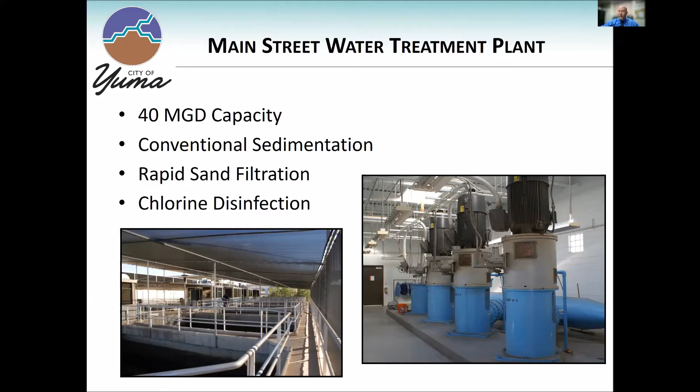Our newest treatment facility is the Agua Viva water treatment plant. It was built in 2009. And it's actually two treatment facilities on one site. There's a groundwater plant, which uses groundwater wells, and there's a surface water plant, where we use Colorado River water. So the surface water plant is rated at about 20 million gallons a day, and the groundwater site is rated at 9 million gallons a day.

At the groundwater site, groundwater is naturally pure by nature, but there is some sediment in there we want to remove, and that's iron and manganese. We don't want that in there. If we chlorinate the water with that material in there, there's a potential of that coming out in the distribution system. So we use iron and manganese removal for the groundwater site.

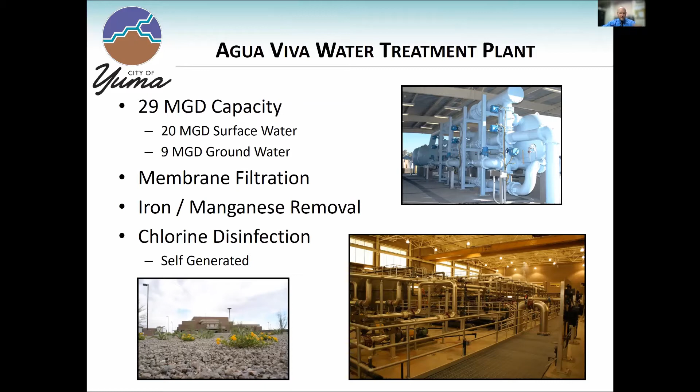From the water treatment plants, the water goes into storage. So we have multiple storage sites around town. And one of the most obvious ones is by the Interstate 8 and 16th Street. We call it our 16th Street booster pump station. On that site, we have 3 storage tanks. Each one is 3 million gallons. So in total, we have 9 million gallons in storage at that site.

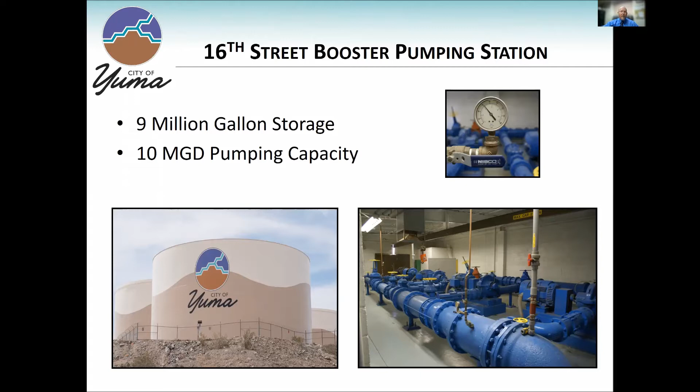Water is pumped there from Main Street, stored on site on demand. So when demand calls for it, it maintains pressure in the system, and it goes out to our customers. We have the capability of pushing out 10 million gallons a day at that site.

We have 2 storage tanks at Agua Viva. Each one is 2.5 million gallons. So in total, they are 5 million gallons. The surface water plant and the well water plant contribute to each one of these sites. It's in storage, and as demand calls for it, it also goes out into the distribution system.

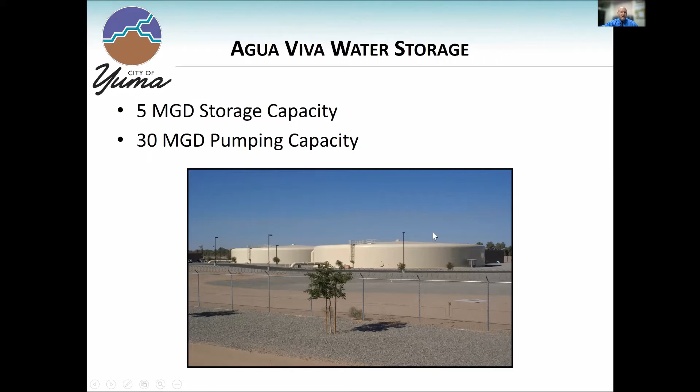One of the most iconic treatment storage towers the city has is called Friendship Tower. Very known in the community. It's used for some of the festivals throughout the year. 4th of July, we hang a flag on top of it. And during Christmas, we use it for a Christmas tree lighting ceremony for the area, Yuma.

So what makes this one unique is it's an elevated tank where the water is stored at elevation. And the water flows out of there just through the force of gravity. And on that site, there's 1.5 million gallons stored.

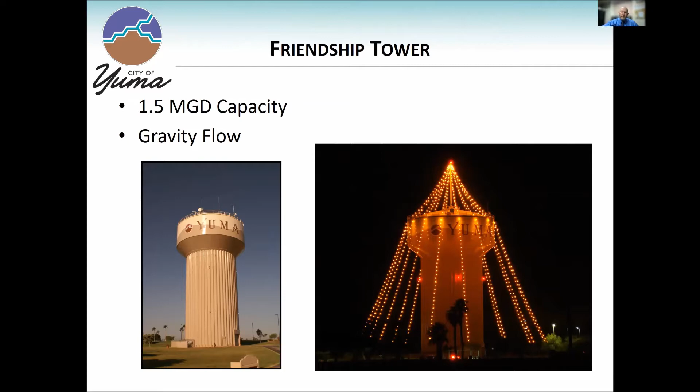So from storage, it goes into all the distribution piping to our customers. So the city of Yuma maintains, again, all this infrastructure. There's about 550 miles of pipe in the ground. There's about 17,000 water valves and various pipe sizes ranging from small all the way up to 48 inches, which is about 4 feet or so.

We have close to 4,000 fire hydrants. Each one of them is uniquely identified, has a serial number, and is managed through a GIS system. So when the fire department needs to respond on site, they know the status of that hydrant, whether it's active, inactive, when's the last time it's been serviced. But the utilities department does all that maintenance on the hydrants. And of course, we respond to all the emergency after hours complaints, issues with leaks along the way.

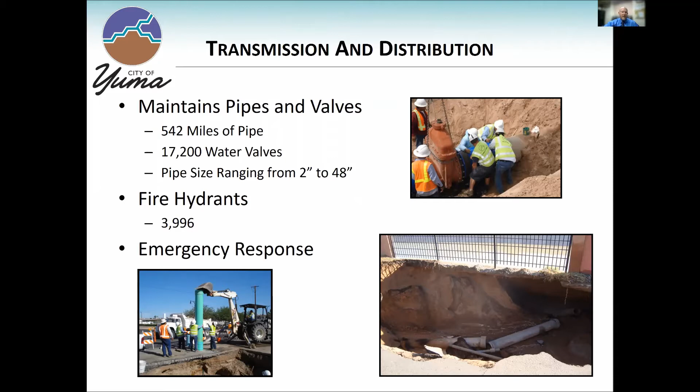The water finally ends up into the water meters. We have close to 33,000 water meters. That ranges from residential, commercial, industrial, and the majority of our water meters for the city of Yuma is residential. Over 50% of our customers are residential, and close to 45% is commercial, leaving about 5% for the industrial water meters.

I do list a small section there as a roving meter. That's our construction activities or unique one-offs where industry may need to move around a meter. So they're local roving meters, and we do that on a monthly basis. We'll check it out to a user. They use it at will, and they bring it back to us to service and read and bill them.

All the fixed asset meters that we have deployed, the 33,000, is what we call an AMR system, which stands for automatic meter reading. So no longer do we have to go on site, flip up a register, look at a dial with a pencil, write down the quantity used, the consumption.

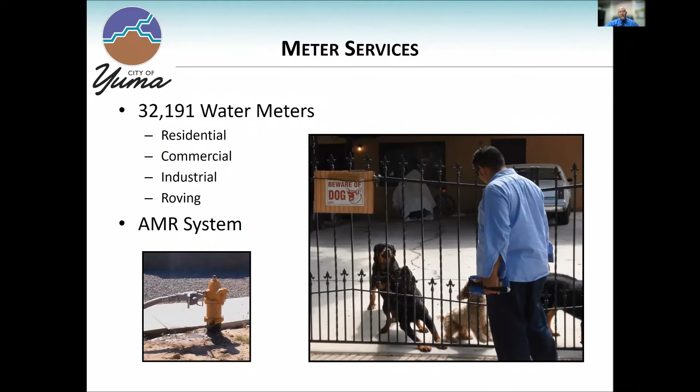We actually drive by with a computer, and within a geographic area, such as a neighborhood, a city block, we can pick up all those water meter readings monthly, put it into our system, and get it back to customer service for billing. There's a lot more data in there. And so if we have issues with water complaints, we can actually dive into the data, and it keeps information about water consumption. And we can tell you exactly when water consumption starts and stops through the technology in AMR.

That's where our customer service crews come in. So they're the team that comes out and they do the interface with the public. They do our turn-ons and turn-offs. If there's issues with non-payments, they'll come out and talk to the customers about the water going off. We'll hang notifications that the water service is turned off, and how it can get turned back on.

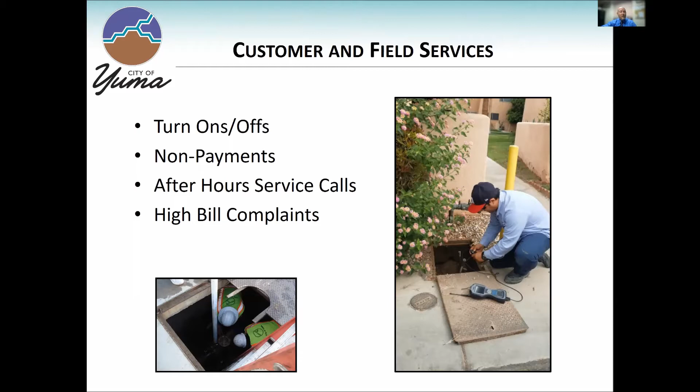Being the front line for the department and for the city. Trying to resolve those high bill complaints if they have them, and provide information to the customers about when the water consumption may have started or stopped, such as a sprinkler system coming on overnight, or maybe a toilet not working.

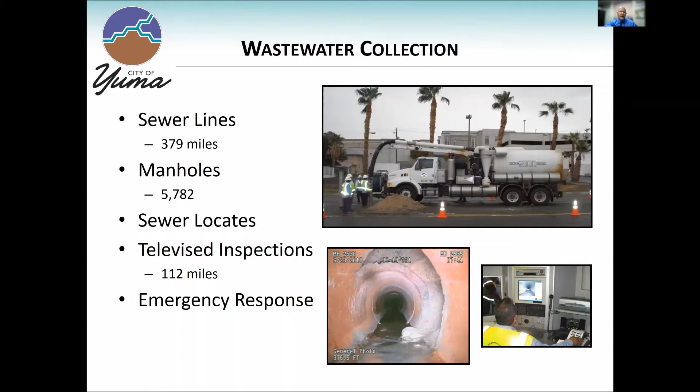We inspect linear feet, and the operator on the right-hand side of that, we see what he sees from his computer screen. He notes any breaks in the line, the condition of the line, the size of the line, the type of line, such as clay, PVC, concrete. So we typically do over 100 miles of pipe inspection a year as well. And of course, they do emergency response and issues what we call sanitary sewer overflows, which are environmentally regulated occurrences of release of wastewater.

So from the gravity lines, the wastewater is not a pressurized system, so it flows into what we call lift stations. So being gravity, it flows downhill to a point that becomes too deep, kind of dangerous to manage. So we lift it back up, still underground, but maybe just a couple feet below the surface. Then we let that gravity flow again to a deeper elevation, such as 33 feet or so.

We have 25 of these lift stations around town. They're located within neighborhoods, sometimes geographic locations, like in front of the Marine base. We call that one the 36th Street lift station. Rather large, kind of does a majority of the share. And they all lead back to the wastewater treatment facilities.

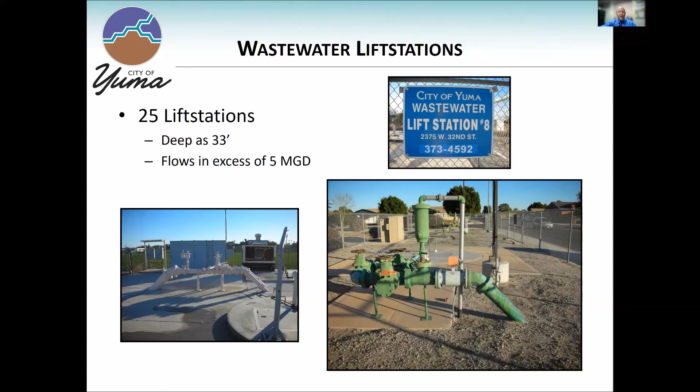Each one of them has signage. So sometimes an audible alarm will go off and indicate there might be a problem at that site. So if any of our public out there, they can relay that back to our customer service team. Hey, there's a problem with, in this case, lift station 8. And our guys who are on call 24 hours a day would go out and respond and see what exactly the issue with the lift station is.

So as the wastewater goes through the lift stations from the pipes, it all ends up at a treatment facility. The city of Yuma runs 2 treatment facilities, Figueroa and Desert Dunes. The oldest and largest is the Figueroa Avenue Water Pollution Control Facility. Its current design was conceptualized in 1968. It predates the Clean Water Act, which came in 1972. But even before 1968, it was a primary treatment facility, which means for the area, it kind of removed some of the largest stuff in wastewater and discharged it to the river.

So when the Clean Water Act came in, it really required specific requirements of water quality. And that's what the plant was designed to do. It was designed as a 12 million gallon a day plant. It's currently treating about 8 million gallons a day. It's a conventional activated sludge, which means it does secondary treatment, and it uses an aeration basin process. Of note is the water that's treated by the Figueroa facility is discharged to the Colorado River, and that's very important to us, and I can talk about that in a little bit.

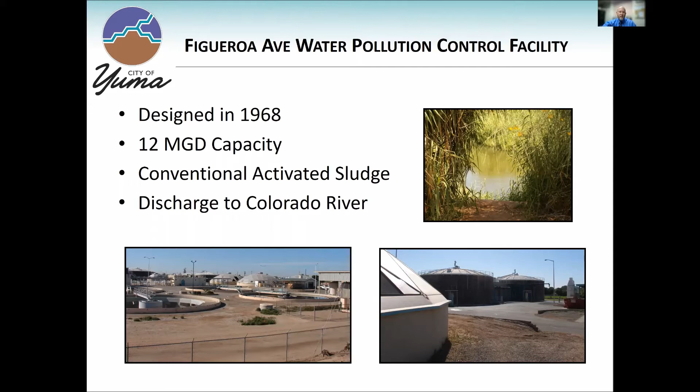The second treatment facility that the city of Yuma operates is the Desert Dunes facility. It's our newer one. It was built in 2005. It's located about 40th Street and 6E. It was built on what we call the Mesa. And the reason we chose that site is predominantly where we anticipated the growth to occur in 2005. And sure enough, it has grown exponentially out there in the last several years.

The site, being newer technology, being 2005, it's a conventional activated sludge plant. It does extended aeration basin. It also removes nitrogen and ammonia to a better degree than the Figueroa facility. The site doesn't use hardly any chemicals. Actually, I would go out and say it doesn't use any chemicals for treatment. It's all through natural processes, and the disinfection that occurs there is through UV lamps. So it sterilizes any microorganisms and kills them before discharge to percolation ponds. And those percolation ponds are connected to the aquifer.

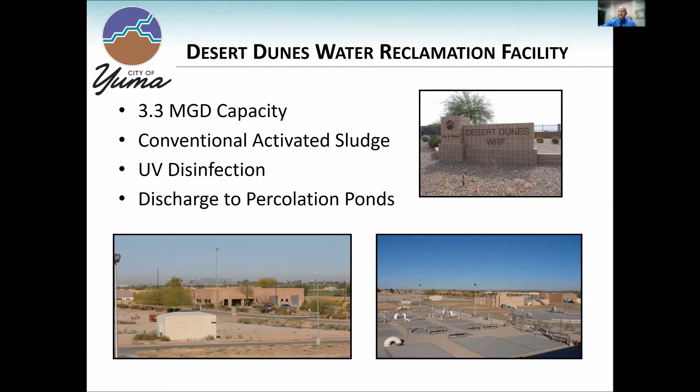We have support departments, support divisions for the department. We run our own environmental laboratory. We have about 5 people who work in our laboratory. It does our in-house compliance testing, predominantly for our solids. We run about 6,000 tests a year. It's a state certified laboratory and very active. We don't do all of our compliance sampling there. Some of the more exotic parameters that we may have are shipped out to contracted labs in the Phoenix area, but we do the majority of our sampling and analysis in-house.

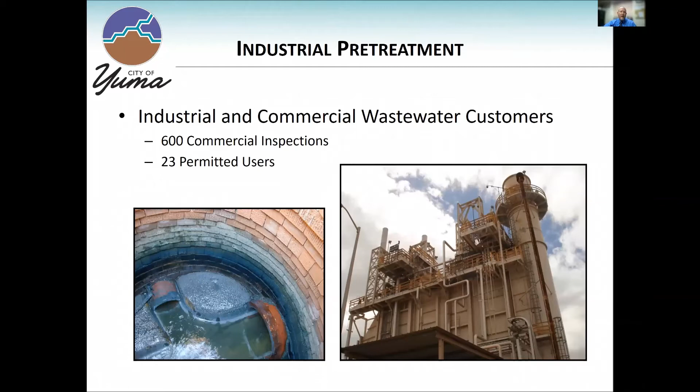We have a backflow section, the city of Yuma does. So what we try to do, and it's required by law, is that once we treat water and we sell water through a water meter, that water does not come back into the distribution system and contaminate the water that's there. So it's a one-way valve. Once it goes onto the customer property, that water stays on the customer property. There's a variety of situations where water could backflow. It's all predicated on pressure differentials, which happens all the time.

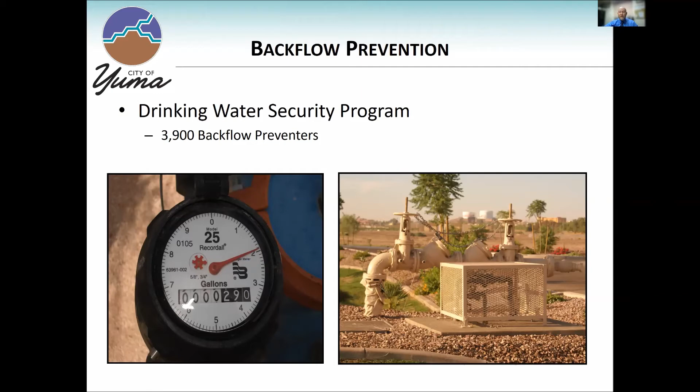One thing I'd like to note is that even though we have 4,000 of them, residential meters, houses, are exempt from the backflow rules. So you don't see those on houses. You do see some in the construction code. So you'll have these atmospheric vacuum breakers, AVBs, put on hose bibs of houses, but they're not testable or regulated devices that the city of Yuma is involved in.

The Consumer Confidence Report is our annual water quality report. We produce that every year. And the FOG program, FOG stands for fats, oils, and grease. It's an outreach program that we try to engage in with some of our fats, oils, and grease producers to make sure that material doesn't end up in the sewer system.

The last 2 items you can find on our website, more about Water Week. We celebrate in-house, and the water video is a very fun and interesting video that we produce that asks questions of the public, and they give their answers and maybe how far off they are from the true response, such as where does your water go when it goes down the drain, and whatnot. So that's our outreach.

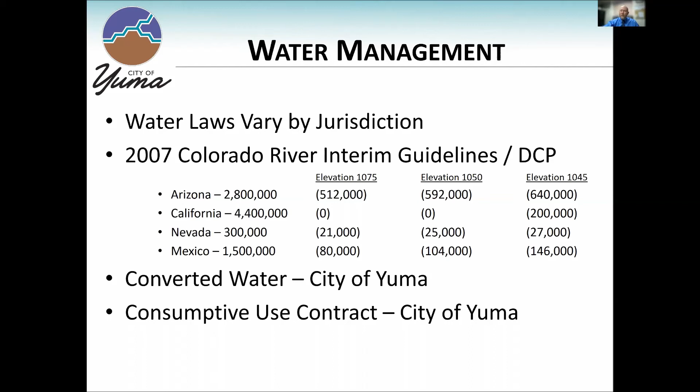But I'd like to point out that there is no shortage of water. What there's a shortage of is cheap water, free water, water that's in the river. That's already going to be allocated. It's already going to be used. There's already people in line. So we're going to have to look at using alternative sources or treating what water is available to us to a better standard. So we can desalinate water. We can put water through RO systems and make that drinkable, but it becomes very expensive.

But that's going to be one of those paradigm shifts that we face in the West Coast about how much we're willing to pay for water. It's not something that's unforeseen. It's something that's doable. 20 years ago, you would gawk at paying so much for a cellular phone bill, but now people pay a lot for their cell bill, right? It's just what they're willing to accept.

But there is no shortage of water. The earth is made up of 2/3 water. So the water-hungry coastal communities, once it gets to a point that there's enough demand, those facilities can put in RO systems and treat water for their customers. It's just going to be an expensive water bill. So that's what I kind of leave you with, that there's going to be a higher dependence upon technology as we move into the future for water security.

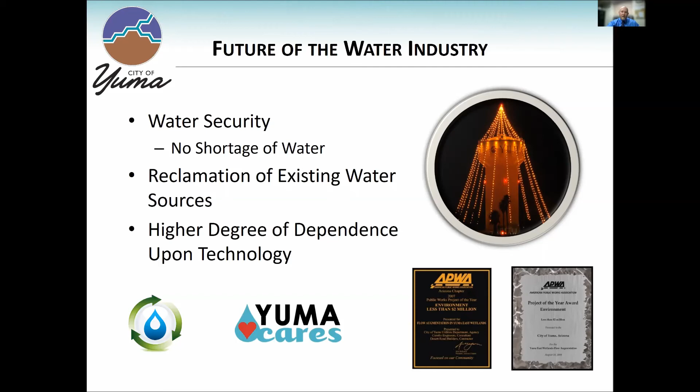Thank you, Jeremy. This is fascinating. Thank you for sharing this very valuable information on water infrastructure and management. Water is now and should continue to be valued as a vital asset to our continued development in the region. If anybody has any questions, this is the time to type them in. Feel free to ask away.

We do have a question from Councilman from the City of Yuma, Mr. Gary Knight. He's asking, Jeremy, how often do the meters need to be calibrated? So the water meters have a life of 10 years. The AMR meters have a lithium ion battery in there that's guaranteed for 10 years from the manufacturer. The calibration, they guarantee that. So the calibration is good as long as the warranty from the manufacturer for the battery is. We typically try to replace it about every 7 years or so.

We'll go out through due course of our meter replacements. We don't have to replace the electronics. That's a separate device from the physical meter nowadays. They come apart. But at any time, if there's any question about a meter's accuracy, we have a division that tests meters in-house. It's actually a test bench. So at no cost, we'll pull out a meter, we'll put in a meter, we'll run a test for that customer, and we can tell them how much it deviates. We'll run a known quantity through, and we can tell the customer how far it's off.